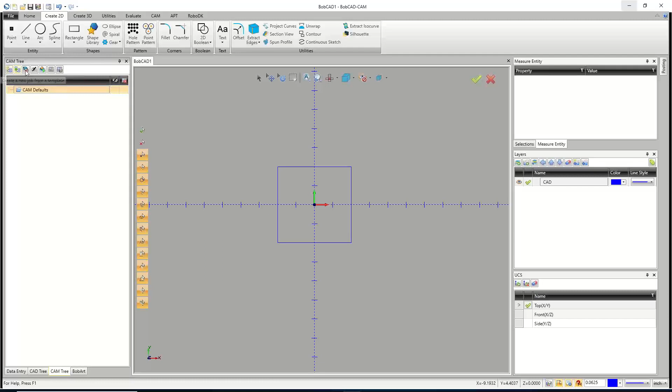So the first way is if we right click on CAM defaults, we have new job. The other one is this little button on the quick access toolbar, add new job. And finally, the last one is on this CAM tab here, new job. They all take you to the same exact place. So you're going to go to the machining job and pick your job type. And just so everyone knows, we're always going to be using milling. Milling is what we use.

The way that we define that this is for a laser, a plasma, or a water jet is by going down here and picking the laser, the plasma, or the water jet. Now, some of you have lasers and everything in here already, built into the system. All you guys with the Baileigh plasmas, we have 3 of them: the Fangling, the Rich Auto, and the Starfire. We have the Baileigh Waterjet. I'm going to just be using the generic BC laser, plasma, or waterjet.

But look through here, there might be one already loaded with BobCAD. We have a lot of these machines and posts that show up with BobCAD. So take a look in there and see if you find what you're looking for. Like I said, I'm going to use the BC3X plasma. And then from here, we're on to step 2 on that page. So we're going to go right to the stock wizard.

The first thing it asks us for is a workpiece. A workpiece is a solid model that represents the final finished part. I do not have a solid model, so we're not going to pick a workpiece. This is one of those things that if you don't have it, don't worry about it. Just skip it. So we'll hit next right here, or forward, or whatever it says.

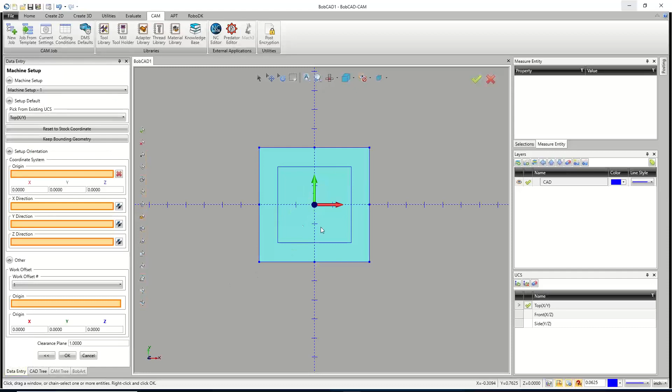So next, right here, we have our origin. I drew my part centered on XYZ 0 specifically because that point is my origin, and that's where I drew it. So I don't have to change anything here. I'm just going to scroll down to the bottom and hit OK.

So again, if I go in and I right-click, let me first blank out the stock. So going in and actually adding the toolpath, I'm just going to right-click on Machine Setup 1. And the only toolpath you're going to use is a Mill 2 axis. From here, we select our geometry. So I'm just going to hold Shift and pick my part.

And that's our chain select. Again, hold Shift, click on a chain of geometry. And if it's all good geometry, it's all connected properly, it will all light up at the same time. All right. For our chain here, I can actually go in and set the start point wherever I want.

Now, one thing I want to point out, and this is something that happens to a lot of milling people. So if your past or your other machines that you run are a milling machine or a router, then you do want to kind of pay attention here. So when you're doing a mill or you're doing a router job, you have a tool that's spinning, and that spinning motion can cause deflection, and there's a lot of things, it can cause problems.

Plasma doesn't have that issue. It doesn't really factor into that. So the direction of cut isn't as important. But what I found out from just doing BobCAD long enough is whenever I pick the geometry by default, the arrow that pops up, that arrow that we see on the left-hand side of that screen there, is always backwards. So it's kind of 180 off from what it should be.

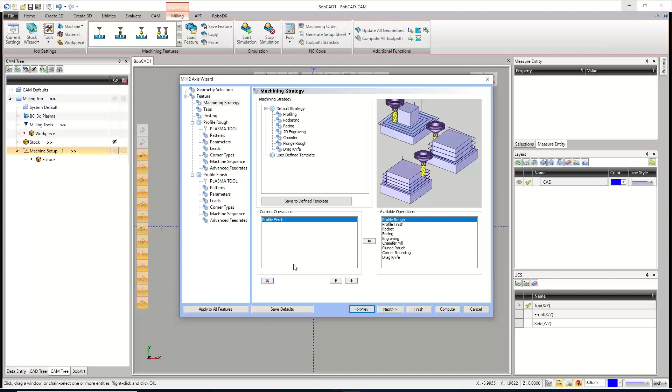We'll go next again. Now for the strategy, there's only one toolpath you're going to use. It's going to be the profile finish right here. So what we want to do is click on the profile rough and then hit the little red X there. Now you could use the profile rough over the profile finish. The benefit of using the profile finish over the profile rough is that it's set up as a finish pass. The rough pass is actually going to have certain passes where material is being left on the part. Your allowance is being left on the part. And so this will make it easy. Everything's zeroed out, so it's all ready for the finish.

So we'll go next. Right here we have our tabs. You have kind of two ways of doing tabs. Yes, you can use tabs through here, and you could do tabs a bunch of different ways. My main way, I'll show you, the first one. So number of tabs, you'd come in and just say, I want 4 tabs. And you'll see that did a pretty good job evenly spacing those tabs for me. That's where I would have put them anyway.

But I could also do a length between tabs. And I had a guy in my seminar class just last week who was playing with this, and he was setting his values to something like a 1/4 inch or maybe more. Let's go, I'll go 0.75. So that would be a 3/4 inch gap between each one of those dots. Lots of tabs. It'd be a ridiculous cut to do.

Something like this, you wouldn't go with 3/4 of an inch. You'd go with 3 inches or 4 inches. You go 4 inches and you end up with 4 of them. Really, we got a 16-inch perimeter anyway, so it's even. But that's just how it goes. So what I usually end up doing, and just because of the shape being so simple, it does get all 4 of these. But another way to actually handle your tabs is to use manual tabs.

And then go in here and say edit tabs. But before you use manual tabs, always set the number of tabs to 1. If you set it to 4, and then you go and use manual tabs, I now have to go in and clear out 4 of them before I can go put my other ones on. So again, set it to 1. Actually, what happens if I set it to 0? So 0 doesn't work. So we'll set it to 1, and then use manual tabs and edit tabs.

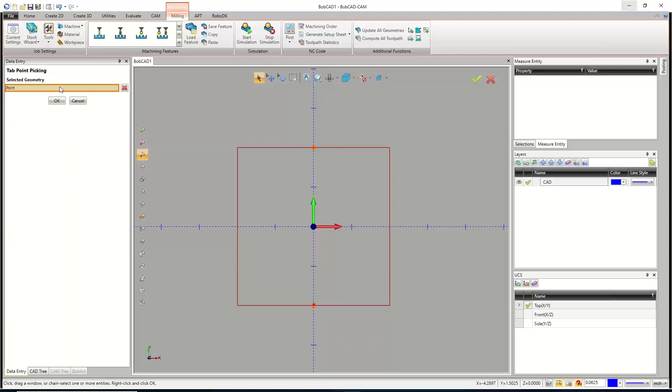And what I do is I'm just going to come over here and I'm going to click on that point that's there. That's designating where that tab was going to be. And let's say I don't want all 4 of them, I just want 2 of them. So I can say I want one here and I want one here. And I'll just hit OK. And now we'll see those are the 2 tabs I have instead of all 4.

Now right here we define the width of the tab. So I can make this 1/8 inch right there. The angle for plasma, let's set it to 90. We don't really want to mess with that. And then the height of it really doesn't matter because normally what this option is going to do on an end mill is lift the tool, cut across the part, but leave an area that's uncut. In the plasma, laser, waterjet scenario, it's just going to shut off the plasma, feed across the area it didn't cut, turn back on, and continue cutting. So, again, I'm not going to use tabs on this right now.

Right here we have our posting work offset number 1. So if your machine does use work offsets, G54, G55, or whatever your machine calls them, this is where you could set up the different work offsets. So we have work offset 1. That's going to be the equivalent of a G54. If you click that box there, you have a drop down. Looks like this one's got 54 work offsets built into it. So you could set up to 54 parts with their own individual work offset if you wanted to. I would not recommend that, but you could.

For your output rotary angle, this is not something you'll use for plasma, so it's not something you need to worry about now. And then next. This contour ramping doesn't matter. All right, so the plasma tool. So this is really what we're testing.

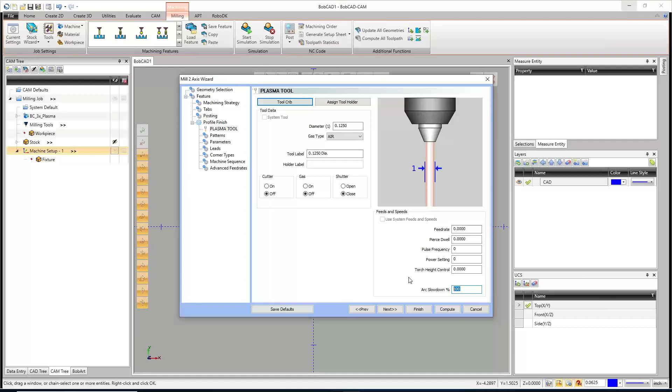Your arc slowdown slows down the arc moves that are output in the program. So if you don't enter a feed rate, there's really not much we can change here. But we really don't use the arc slowdown. You could, but I'm going to show you some other methods. Next, we then have our patterns. So we only have one pattern. It's standard. That's what we want.

And right now you'll see that the system compensation is set to left. Because of the direction I had my geometry, remember my arrow's pointing this way going down, if I compensate to the left of that, I'll be inside. If I compensate to the right of that, I'll be on the outside. So I don't have any rotational forces or climb versus conventional milling that I really have to deal with. So I'm just going to say my system compensation is going to be set to right, so it goes to the right side of the chain instead of the left.

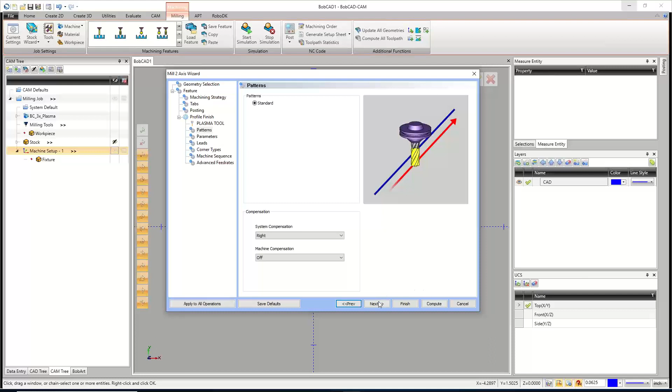Next, we then have our parameters. Now, this is the main reason why we choose the profile finish toolpath over using the profile rough. The benefit of this is I don't have to add or delete or change any settings on this page. It's just going to be set. I don't have any allowances to worry about. I don't have to worry about multiple steps.

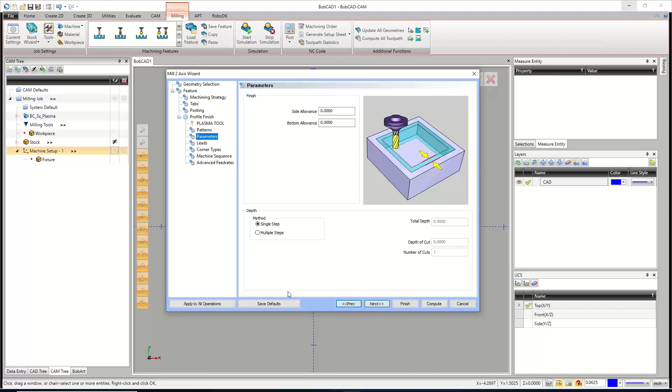So let's go next. Right here for the leads, just going to go vertically. Or in this case, no, we'll go with a parallel lead. So parallel lead, the rule of thumb that I follow is, when you're setting up the length of your leads, you use the radius of the tool. We're using what we're calling an 1/8 inch diameter kind of cutter.

And so I can go in here, and the minimum I'd go is say 0.0625. I'm just going to say it's an 1/8 of an inch right there, and then hit next.

Right here for my corner types, I'm not going to make any changes. If you want round corners on your part, draw your part with round corners. What these options are really doing isn't adding a radius to a corner or anything like that. They're just changing how the tool interpolates the corner. So if your part is drawn with a sharp corner and you change these settings, you will still get a sharp corner. If it were radiusing or breaking your corners at all, then on this round option here, it would ask you what radius you want. Since it's not asking us for a radius, it's just going to change how the tool rolls around the corner. Instead of a hard 90-degree turn like we see with sharp, round is going to round out that path, but you'll end up with the same looking part.

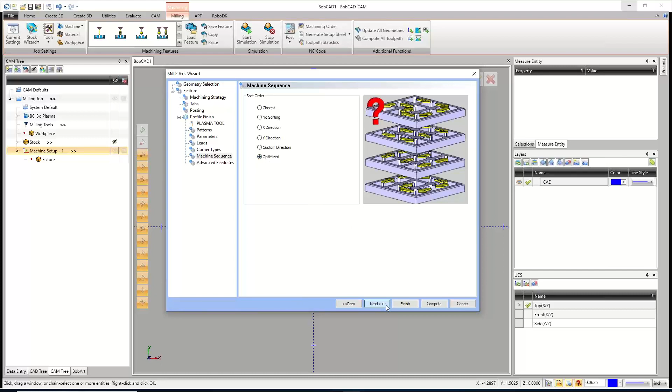And then hit next. So right here we have our advanced feeds, which we don't really have to worry about. But I do want to talk about this thing in the bottom corner, the corner slowdown.

So if you think about your plasma, or probably your laser and waterjet as well, when you make a cut — let me open up a new window here. So when I go to make a cut, we're looking at this from a side view. I'll say it's 1/2 inch thick. Son of a gun — 4 inches, 1/2 inch. There we go. So picture your cutter here, kind of cutting down this side, standing vertically, cutting across the part, just cutting through here.

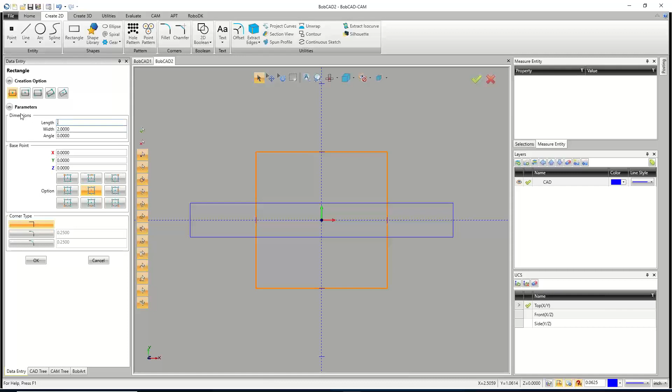When you run that at whatever good speed you get, your plasma does not stay perfectly straight — it's going to have a curve to it. So let's picture this as the plasma, 0.125 length, all right, so there is my plasma. And so I'm going in and making my cut. Give me a second, I got this thing on. So I'm going in and making my cut. The problem is the plasma doesn't actually go straight through — it actually seems to move more on an angle. I don't want to say 45, we'll say 30 degrees though, where the tip of it is spraying vertically, but then it's kind of cutting.

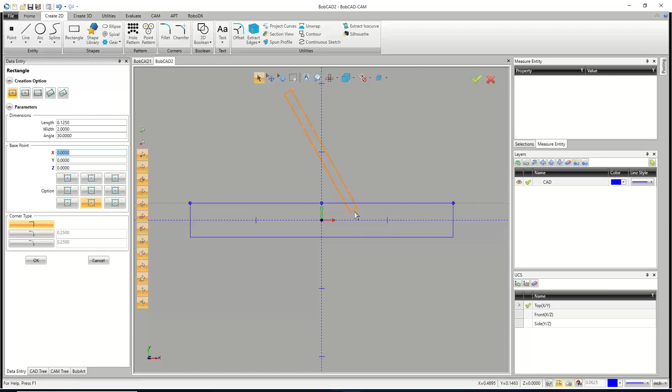It's cutting through the top, then it's cutting through the bottom, which creates an angled section like we see right here, like an angled cut down, but it could also be more swoopy on the corner. It might have a curve to it because it's cutting through the top and then blowing itself backwards, which is fine a lot of the times — cutting simpler stuff, you don't have to worry about it. But if you're trying to be more accurate going around a corner, what ends up happening is if we just let the machine run around the corner without ever slowing down, we end up cutting the corner off because our plasma is, again, not vertical. It's got that sweeping back, always sweeping back in the opposite direction you're cutting in. So if I get to this corner here, and the bottom of my plasma is somewhere down here where I'm working on an angle, and then the head of the machine starts turning, well, I'm going to nip off some of that corner potentially, some of that extra stock that's around the part.

And so they added in this corner slowdown option right here, and you turn it on. You can say whether you want to do all corners, just internal corners, or just external corners. You set the minimum angle that can be read — in our case, we set it to 5 degrees up to the maximum 175. So it's looking for corners that fall between those two angle ranges. Now, the distance from corner is how far from the corner we're going to start affecting this — start changing the feed rates or whatever. And the distance from corner right now is just 1/4 of an inch.

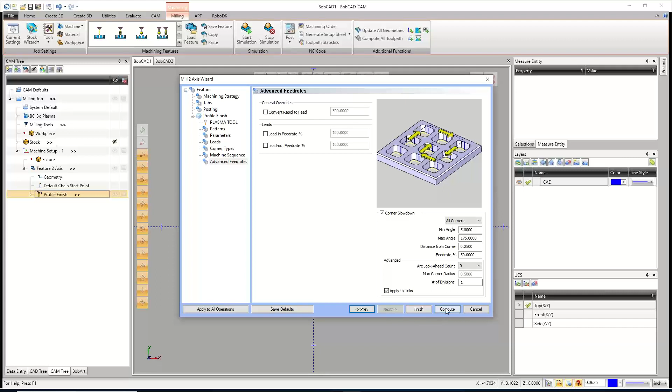I'm not applying that to the links. Yes, I am. All right, so notice we can't hit next anymore. So we'll go ahead and hit compute. And there's our part. My leads are not in the right spot.

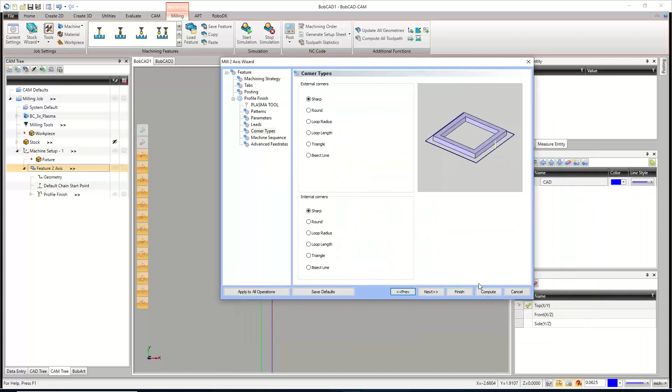Oh, hold on. So I have my corner type set to round, so you'll see that right there. I have a lead-in that's going around cutting, but instead of leading out, it had to radius that corner. So if I go back to sharp and hit compute, now it's sharp. There's our parallel lead-in, then it goes around the part with the parallel lead-out.

So there it is. This is a file I strongly, strongly, strongly recommend building or creating, this kind of very similar part file to this. A 4x4 square. And again, now we're going to go in and we're going to cut. We're going to go take this out to the machine.

So right now what's happening, that green line that we see around here, that's the offset for the side of the cutter to encounter the material. So if I set my diameter here to 0.125, and I got to be real close with this, but I'm just going to go ahead and put this right here on the edge. And you'll see where it touches. That's there to represent the plasma.

All right, right there. Now what I want to do is I'm just going to go utilities and translate. I'm just going to translate a couple copies of this down. I want to just go straight down. So I'll go minus 0.5. That's a bit too much. Minus 0.25. There we go. So we'll go minus 0.25.

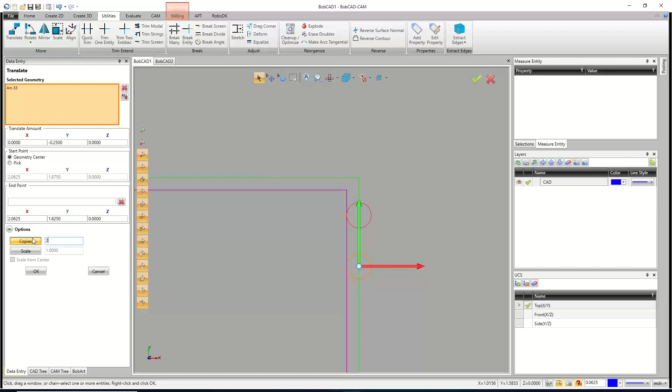And I want to do that for a couple copies, so we'll do, we just need 2. Right? Yeah, so we have 3 total. All right, so this one is set to 100 thousandths.

So now what I'm going to go and do is I'm going to change this one. So I'll say entity modify. Let's see what would happen if we cut this. And it's not actually 100 thousandths, it's smaller than that - it's 90 thousandths. So we'll say 90 thou is the diameter of that hole.

So hit OK. And then on this last one, we're saying it's an 1/8 inch. Well, maybe it's 150 thousandths. So I'll say entity summary, or sorry, entity modify. I'm going to set it at 0.150 and hit OK.

So here's the thing. If I was to go cut this, and it is 1/8 of an inch, that's perfect, right down the center line, just kissing the wall. That's perfect. We go down, though.

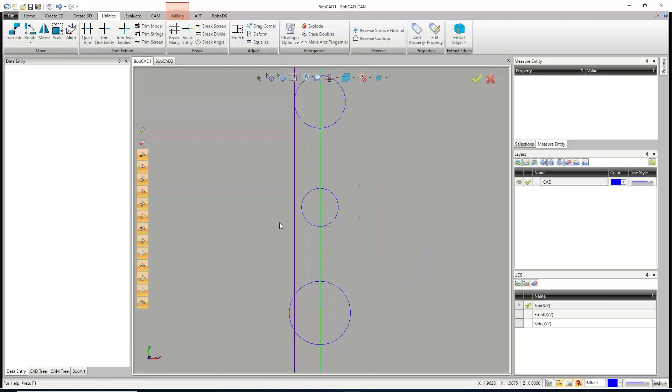This one's here, I got to - I forgot the dimensions I used, so let me just slap some dimensions on here. There's my, let's go 4 places. So there's my 1/8 inch. Why is my height so big? I guess I'm not that big. So there's my 1/8 inch.

There's my 90 thou. And then finally, whoops, and then finally, 150 thou.

All right, so if you were to think about this, that much overcutting is going to make your part not read as 4. It's going to read as something smaller because our tool was defined as, because our nozzle is larger than what we thought it was. We put it, we left it at 1/8.

So it all depends. Now here's the thing. If we were to go in and find out that, hey, this 150 thousandths seems more accurate, it seems closer to the machining, the size I'm doing, you can change it. You can always go into your feature and change it from 1/8 inch to 150 thou, or 90 thou, or whatever you end up needing to change it.

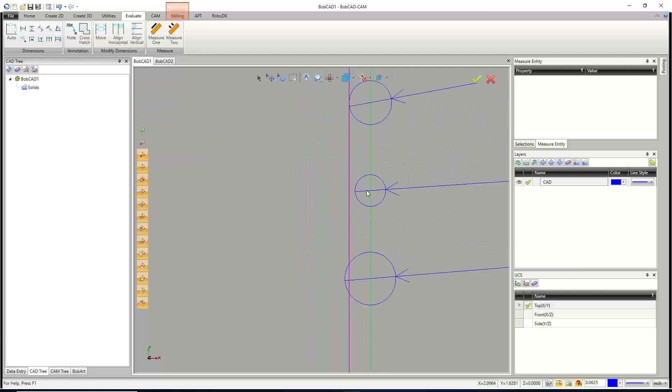So yeah, this is that little test. So you can see, again, if you cut it with a 90 thou tool, we're not really touching the part, we'd have to move this all over. And that's what I didn't really want to do. I didn't want to have to shift anything or make any changes to the tool path.

All right, man, we're getting a good class in here. We got 12 of you. Nice work, everybody. Glad you're here.

So that's pretty promising. It doesn't look awful. The tool path looks good. What we really need to verify at this point, for anyone who plans on doing this, is make sure your post is right. Make sure you pick the right post first, and then go and post your code.

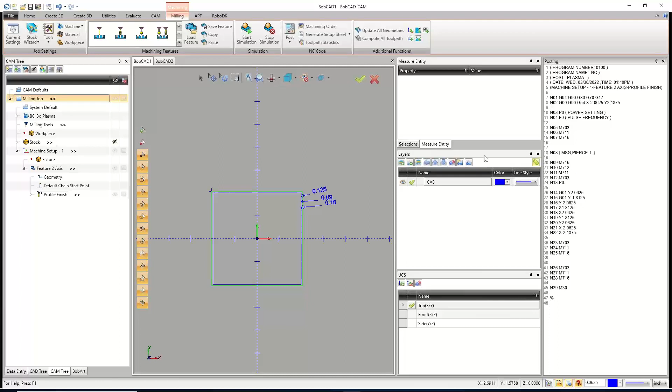When you post your code, you'll be able to look through here and see the sizes and everything, find out if everything looks right. Save it if you need to, or do this later. But let's just go ahead and simulate it. It's not a huge deal to simulate this part. You don't really need it, but I'm going to let it load up. Plasmas and lasers both show up with a red tip, and the water jets have a blue kind of tool sticking out of them. So that's what I got right now.

I'm just going to go ahead and keep it kind of slow. Don't need to go too fast, and say run. And you'll see it's just going to go in and cut a 4x4 square.

Now, if you're going for it, you'd pull it out of the machine, give it a measure, find out if you're off at all. You can use a picture just like this. If I find out that my plasma sprays at 150 thousandths, then I'm going to go in and change everything to 150 thousandths, so hopefully I don't forget it again. But that might not be your number - you just got to find out what your diameter is. This little project will help you figure that out.

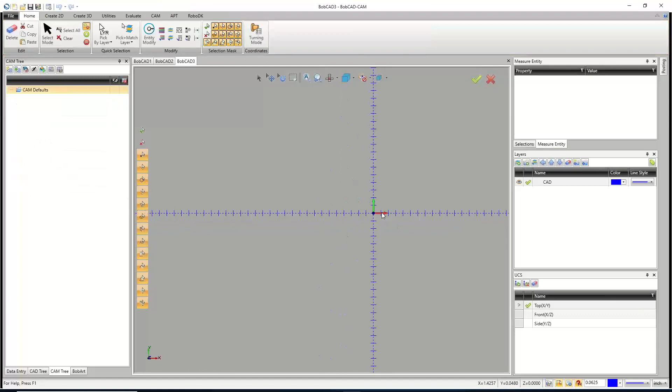Like I said, this is going to be a little bit more in-depth than you guys normally go with the drawings you have to make, but it's not too bad. So I'm going to start off and make a new layer, and I'm going to call it solid, just so I can put the solid there later.

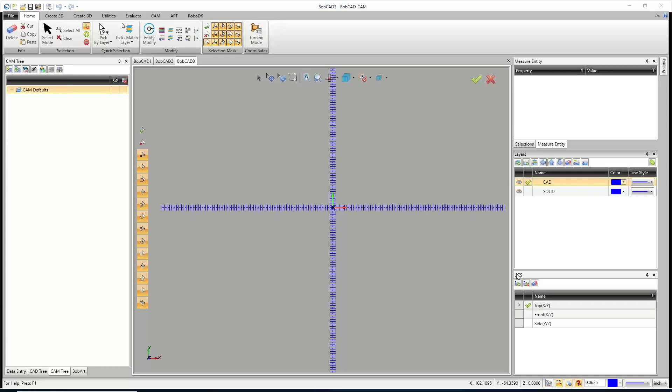This might be the first time some of you are seeing this UCS tab down here and how it works. The UCS, I believe it stands for User Coordinate System - yeah, because it's not universal or anything like that. So by default, we're always opening up our BobCAD in a top plane, a top UCS, and that's where we draw everything. We also, by default, have a front UCS and a side UCS.

Let me just draw out a cube real quick so you can visualize. Here's a 3D cube - I'll make it 10 by 10 by 10. Way bigger than it needs to be.

But this would be looking at it. This is an awful one to do, but let me do it this way. Here, I'll do this. An arc, we'll make it 20 in diameter. So here's a top plane arc. I'm just going to slap it down right there. Now, if I switch to a front plane UCS, that's the difference. So it's the orientation in which we draw our geometry.

If I go to a front, there it is. We're looking at kind of the front side of the cube instead of the top. And if I hit the letter S on here, the letter T, I can't do it here. Let me just set this right on top of that. So you'll see our coordinate system in the center actually changes.

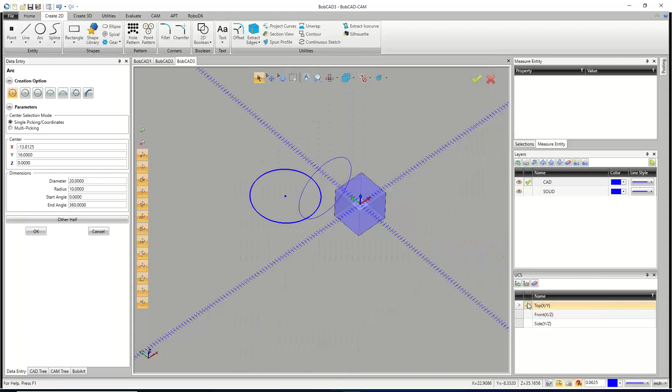Our top UCS has the blue arrow sticking up. Our front UCS has it sticking forward, and our side UCS has it sitting sideways. And it's looking at it kind of like this view here. So again, this is a good way to represent your different shapes. So I just want to go in and use this side UCS, all right?

And I'm going to start by making an arc where the diameter is 3 inches. And I'll hit OK. Let me zoom in on that right there. So there's our 3-inch arc. And then I'm going to make one that is 2.75. So we'll have 1/8 inch walls on here. So I'll hit OK and cancel out. And there we have our kind of wireframe for this.

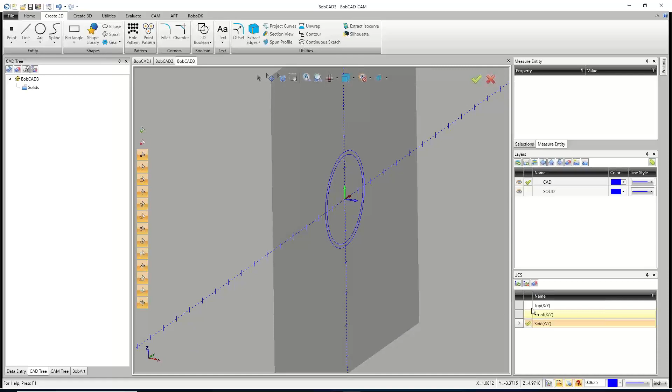The reason I like to draw it this way is now when I go to a top plane, that's already rotated for me. I could have drawn it straight and then rotated it, but that's a lot easier. You just draw it from a side plane. Now what I'm going to do is take this. This is going to be a tube eventually. I'm going to create it as a tube, and then we're going to unwrap it to make it a flat object that we could cut and then roll back up. A very small scale example.

So I'm just going to go to Create 3D and then Extrude Curve. I'm going to pick that geometry right there. And I'm going to make it, we'll just say 8 inches long. So I'll hit OK and cancel out. So this is like having a 3-inch pipe. I don't think I have the offset right for the size here, but we can find out.

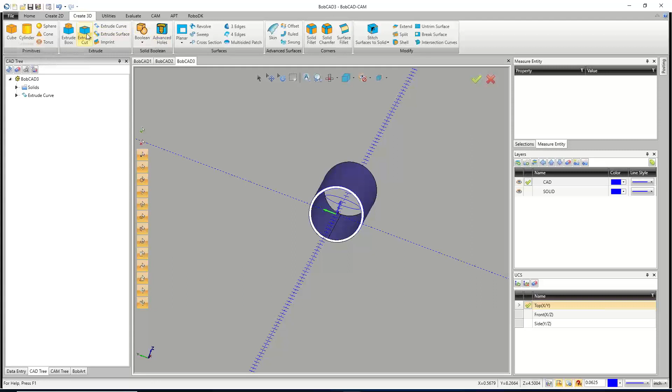So I'm going to go up to the Create 2D tab here, and create another arc. I'm going to set the diameter to 2, and move it to the center of that pipe. So I'll just go 4 inches down. Now you don't see the preview, but I promise it's there. So I'm just going to hit OK and cancel out. And if I rotate that, there it is. Now I'm going to go to Create 3D and Extrude Cut. And I can take this arc right here and extrude it through the model, just like that.

Now, if you were cutting this, I do have some customers that have 5-axis lasers and water jets, and they'd be able to cut this right on the pipe. But if you're doing like the fire pits and everything, you're going to cut it flat and then roll it up. And so I can't just cut a perfect circle in here if this is actually getting cut flat. So I didn't plan ahead.

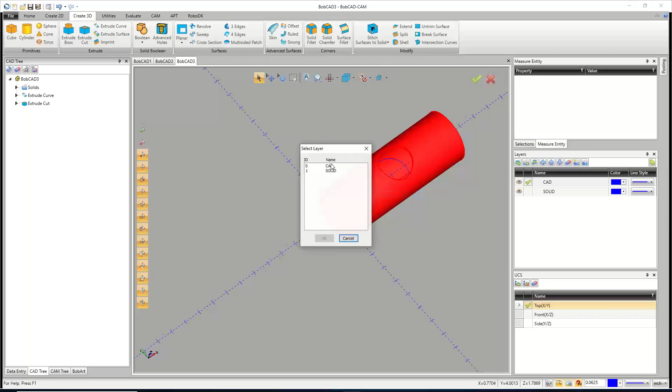Give me 1 second. I just want to move this solid onto the correct solid layer there. There we go. So now I can hide that CAD. So now that I have the solid model, what I need to do is get this as wireframe geometry. I need it as the geometry I would want to flatten out and cut.

And so I'm going to go over here, right click and add a new layer. And this feature is called Unwrap, so that's what I'm going to name it. Now you can find the Unwrap feature by going to Create 2D and then right up here next to contour, next to the Extract Edges area in the utilities.

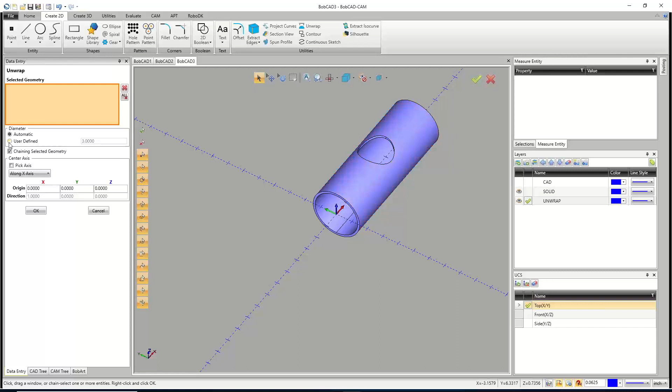So you just go to Unwrap. Now the diameter, you can either go in and define the diameter. We have a 3-inch diameter, or there's an option to just do it automatically. And that's what I usually end up using, unless I have multiple sizes. Maybe you got a stepped part that's a 2-inch diameter, then it goes up to a 3-inch diameter, something like that. That you might want to go in and define based on which surface you're picking.

But for me, all I'm going to do is pick that surface, just like that, and it flattens everything out. And I can hit OK and cancel out. Now, if I turn off my solid, I'm left with this geometry. And you'll see that is not a perfect circle, but it becomes a circle when you wrap it back up. So for my part, you'll notice it didn't give me end lines. All we did is unwrap the edges.

So I just have to go to line here, and I'm just going to join that point there to that point there, and I'll go to this side, and then that point there over to that point there. All right, and cancel out. Now, what you'll also notice is it's at a height. It's raised up, and I don't actually need it raised up at all. What I'm going to do is take this whole thing and translate it so that this corner here is, we'll say, 1/2 inch away from my XYZ origin.

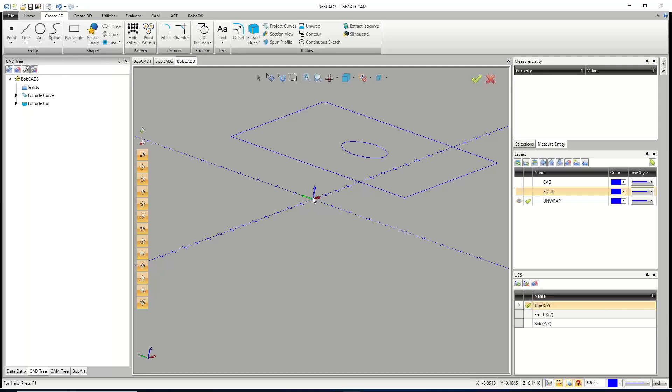So to do that, we go up to utilities here. And then right here, we have translate. On translate, the first thing I'm going to do is pick my entire piece of geometry. By default, it's going to grab the center of the geometry. But I don't want to control the center. Yeah, I could go figure out the length of all this stuff, but I don't want to. I'm going to say pick.

What pick allows me to do is I can now hover over this bottom edge and pick this bottom point here. This point, I want that point to end up at x 0.5, y 0.5, z 0. So it's going to drop it down in z and move it for the x and y moves. And then I'll just hit OK and cancel out. And so that represents my part.

Now what I'm going to draw is a rectangle. So I'm going to go create 2D rectangle, and for those of you that got a 2x2, it's whatever size your machine is or whatever size piece of stock you got. If you got a 4x8, you could set up a 4x8. If you got a 5x10, go 5x10. 2x2 is what I'm going to do right here. So 24 by 24.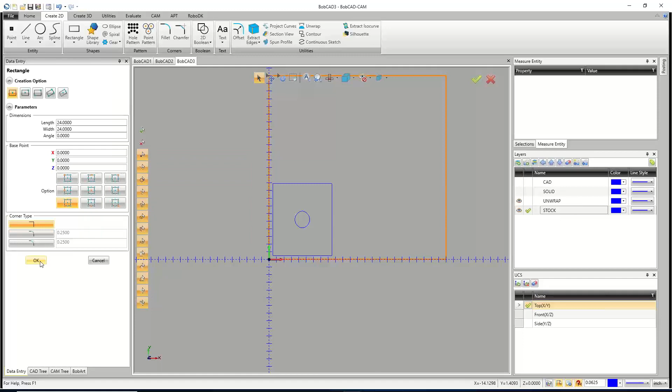I like to draw these rectangles that represent my stock, only because it makes my life a bit easier when I go to actually set up the stock for this. So this really is just stock, and the best thing to do for this would be to make a layer, call it stock, and then right here, I just want to put the bottom left-hand corner on XYZ 0. So just like that. Now I'll hit OK and cancel out. And there we have it. So now we have our stock drawn out.

So the next step would be, do I only need one of these? Do I need more than one of these? What's the steps here? There's quite a few ways to actually make more than one part. There's toolpath patterns that allow you to pattern it to the geometry, and I'll show you guys an example of that. But there's also just using the model, using your CAD and moving extra copies over.

So I'm just going to go Utilities and Translate, and I'm going to hold Shift and pick this inside circle shape there and the outside shape. And I just want to give it enough space to go straight up. So I don't want to move over in X at all. I don't want to move it at all in Z. I want to leave it right on that Z plane. And so in Y, let's say 10 inches. So if I go with 10 inches, it leaves me a gap between the part. Again, I didn't measure the length of that edge right there.

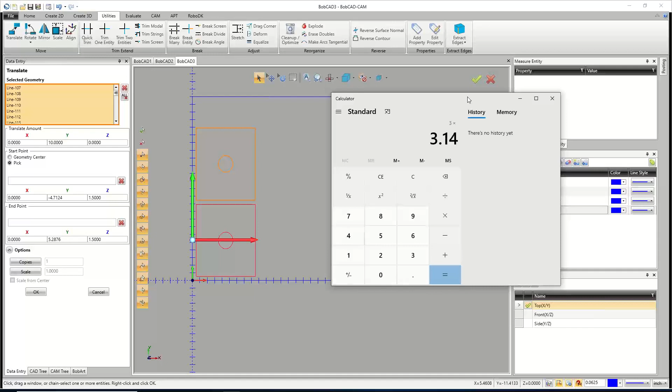I could go measure it, or you can just pull out your calculator. We unwrapped a circle, so we could actually take the diameter 3 times 3.1459 pi, enter. The length of that chain, the length of these lines here, should be about 9.4. So going 10 inches should leave me about a 6/10 gap between them.

Let's go a little bit bigger. I'm wasting, I don't have much. I can't fit another part up here anyway, so I'll just go 10.5. So 10.5. There we go. That gives us plenty of space between the part to make our cuts. The big thing here, and the thing I always forget to do myself, is turn on the copy button. Make sure you turn on your copies so that you don't lose your original and just move it up to there. So I'll hit OK.

Now we have these two. And since I'm in here, let's check our math. If I measure this edge, we will see the total length is 9.4248. We calculated it out as 9.43. Close enough. Good enough. Did I do 3.14? I had a 141 is what I needed. I did it a little off, but that's fine. It gave you enough to know where I needed to be.

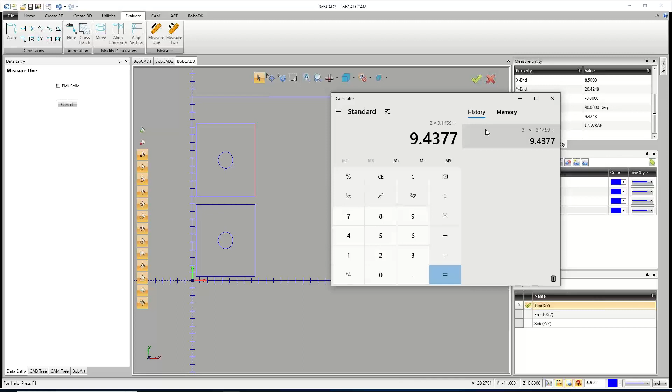This one I'm going to measure as well. This one is a total length of 8 inches. That's how wide I made it. Should have known that. So I'm going to go 8 inches. We'll do, let's say, a 1/2 inch in between them, so I'll go 8.5 inches. So again, I'll go Utilities, Translate. X will be 8.5. Y will be 0. And I'm just going to drag a box over these two parts.

Now, one thing I do a lot is I over select like this, where I'm accidentally grabbing these edges for the stock. Happens to me all the time. But remember, when you pick a piece of geometry, to deselect it, all you have to do is click on it again or drag a box over it again. Remember, boxes for BobCAD, we don't have to grab the entire part. We just need that box to touch any portion of the geometry, and we're going to grab it for you. So you can draw these real tiny little boxes over pieces of geometry to select and deselect them. That's what I do a lot of times.

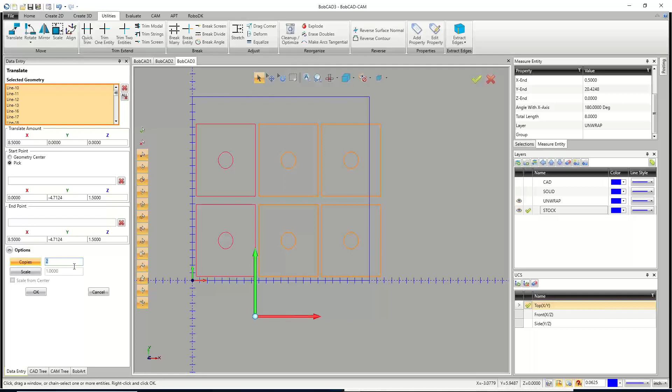So right there we have our 8.5. That's our gap down the middle. I can't fit a third one, but if you wanted to see, you could come in here and say, give me 2 copies. And you'll see we're off by about 1.5 inches, 2 inches right there. So it's not enough to get 3. We're going to get 4. So copies 1, hit OK, cancel out. All right, so now we have 4 parts getting cut, and I'm going to go machine them.

So again, we're going to right click on our CAM defaults. We'll say new job. We're going to go milling. Again, I'm just going to use my plasma because I'm going to steal the tool path I've already done. And I'm going to go to my stock wizard here. Because I have this square around here that represents my stock, when I hit next, it's automatically going to fill that size, 24 by 24. I just have to come in and give Z. The thickness of those walls was 1/8 inch, so 0.125 should be perfect, just like that. From here, I'll hit next.

And my origin on this one, I'm going to use the bottom left-hand corner. Some of you guys might use that. Some of you might not. It's really dependent on your machine. This all comes down to whether or not you have a work offset or a G92. If it's a G92, you could go from the left. You just have to set your part up there.

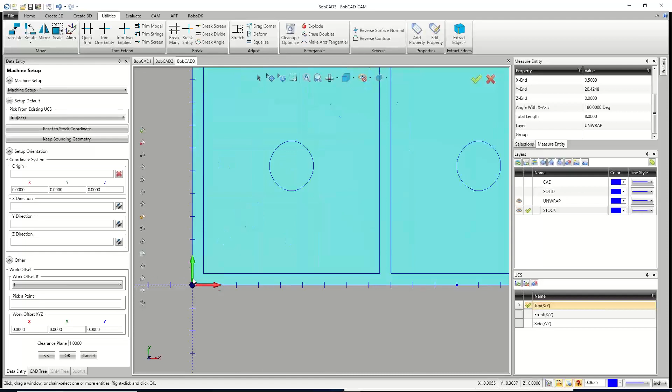If I have a G92 for a plasma, I'm usually going to try and make sure my stock is a bit bigger than my part. That way I could kind of jog the machine in, get it over the material in the corner here, maybe a 1/4 inch up and a 1/4 inch over, and then all my tool path will start a 1/2 inch away, basically this distance away. But it all depends. It's really going to come down to your specific machine. If you're struggling with it, give us a call.

Talk to tech support. Let them know what you're running into. We can help you try and figure out what you might need to use for an origin, or book some online training. Me and Andrew have done many hours of these laser, plasma, water jets, so we're pretty confident in it. And the best thing about the online training is we get to work with your parts. You guys get to send us some parts and say, this is what I want to make, and we're going to show you how to make them.

Because some of you guys might end up doing a lot more CAD work than I'm doing here. We don't have a nesting package anymore. We used to have it in the older versions, but we don't have any way to nest out parts. There is a program. I'll try and find the website. I can't remember what it's called. I believe it was nest.io. Let me see real quick. Nope, that's not it. CAD nesting IO.

So there's this one here that could potentially work. I've never used it. Give me a second, let me open it up. But I believe if you guys ever talk to tech support, you talk to Jason, I believe he's used this. So you download it. It's a nesting software, and you can export DXFs right from it. I believe this is the one. It's called deepnest.io. I'll play around with it later on today. I haven't had a chance to do it yet. But that's a killer one. Might be something that you can use.

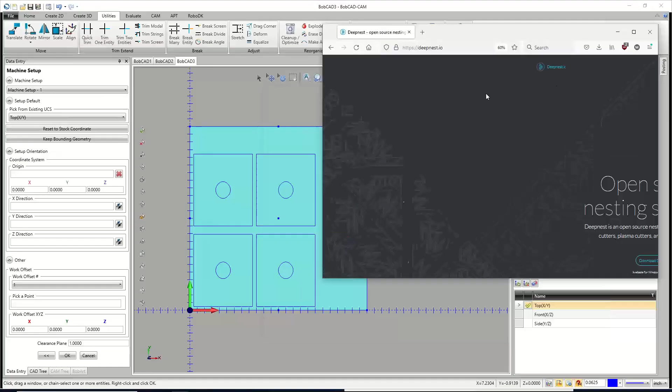But also, this system might have the ability to do something called common line cutting. If this is all nested through this, you can see right here, it's very faint, and I apologize, I can't zoom in on their picture here. A common line cut is where one pass makes 2 parts. It's cutting the left side of one part and the right side of another part as it passes through. We couldn't do that by default, but it's something you could definitely look into. You could set up your parts.

Technically, I could move this geometry over. Basically, I'd want to leave an 1/8 inch gap between these 2 parts, but then I'd want to draw a line down that gap. And instead of offsetting my cutter, I would just do a center line cut. So if these two parts were close together, say an 1/8 inch apart, if I made one pass down the middle of them, I end up cutting both of them.

Now, I've gotten mixed results with my own stuff when you're cutting two parts, more for milling, where the left side part looks great, but the right side didn't look as good. You can end up with situations like that. But it's plasma. Really, direction of cut isn't too important because there's no rotational forces we have to fight against. So I just want to come in. That's it. I'm going to hit OK. So I have my 4 parts done.

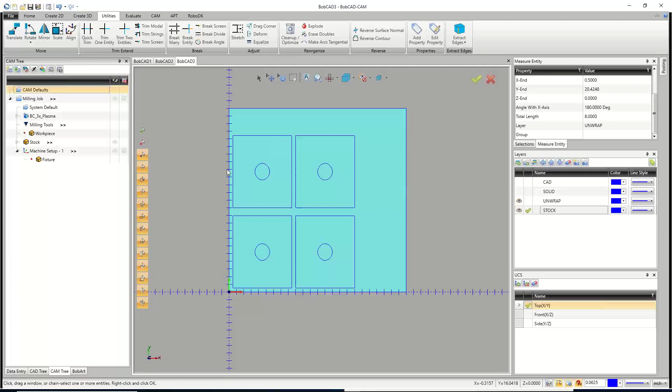Now, after you've made a tool path, after you've tested that 4x4 square that we created just a few minutes ago, and you found out that your diameter is properly set, then what you could do is actually save that tool path. So I'm going to go right here. I'm going to say that this did properly set. My plasma is 1/8 of an inch. Perfect. Again, this is the dialing in you guys need to do.

But after I have it, I can right click on here and either copy and paste, meaning I have the part file open like I do here, BobCAD 1, I can copy it.

I could bring it over to BobCAD 3 and I can paste it. The problem is, what if I'm just working on this file? I don't have any other files opened up. Well, the best way to save it is to save it. Instead of copying and pasting, where is it? Save the feature. So I might have more than one in here. Yeah, I got a bunch of them from plasmas and all that stuff.

So the biggest thing here is you want to make sure that you label it so you know what feature it's for. Now, for those of you that don't enter feeds and speeds in BobCAD, the thickness really doesn't matter. I mean, it does matter when you get out to the machine, and it does matter when you set up your leads. You know, if you're cutting 1/2 inch thick material, you have to pierce longer than when you're cutting 1/8 inch thick material. So that stuff will have to be factored in, but most of that stuff, for some of you, will be done at the machine. The leads will not be done at the machine. The leads will have to be done in BobCAD.

Again, go through the manual, see if they have cutting conditions in there, because I know for a fact that Thermal Dynamics A60 will tell you how long to pierce and how far away to be from your geometry when you look up the material. Like if you're doing certain thickness of aluminum or steel, it'll tell you how far away to try and start, how long to pierce, and then what feeds to use. So it's kind of all ready to go.

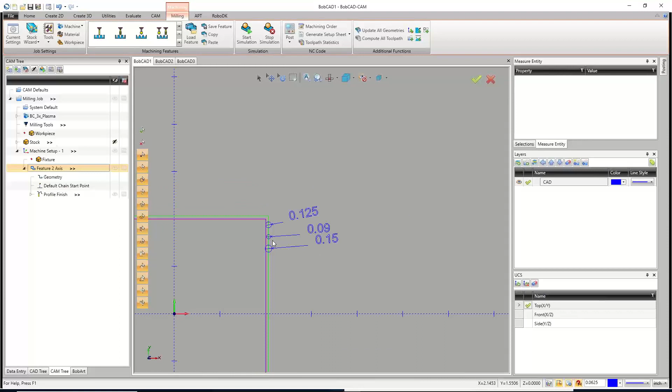So I'm going to call this live event, just so I know which one it is. Live event plasma toolpath. All right, save. Now, the cool thing about that is when you save a toolpath or when you copy and paste a toolpath, we remember every setting you put in. So for those of you that don't get the luxury of putting all your feed rates in at the machine, you're going to put them here in BobCAD. After you set those feed rates and pierce dwells and all that stuff, it's saved for good.

The only difference would be if you have different gauges of material. If you go from an 1/8 inch up to inch thick material, those feed rates are going to be different. So you would want to save a separate toolpath for each thickness. But even that's not that big of a deal, because I could load a toolpath that was made to cut an 1/8 inch, pick my geometry, go into the settings, and change those settings to make it ready to run for something that's an inch. And then after I compute it and everything looks good, I'd then save that toolpath. So now I'd have a toolpath for the 1/8 inch, and a toolpath for the 1 inch thick or whatever else.

So now that the toolpath is saved, I can right click on Machine Setup 1, and I'm just going to go down to Load Feature. And I'm going to pick my live event plasma profile here. And it'll say, do you wish to use the same type of feature and depth values? Yes, I would. Now, again, when you copy and paste, when you save and load, we remember everything you did except for what geometry was selected.

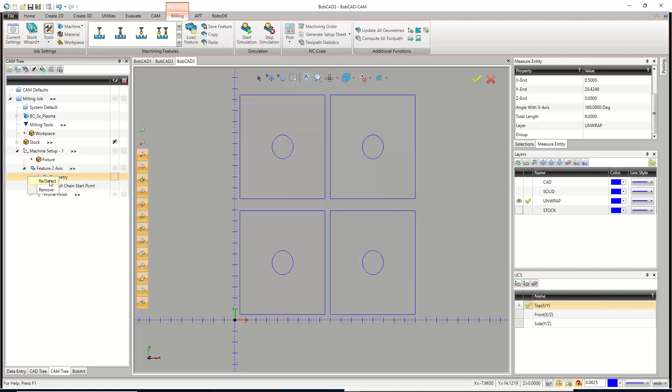So I have this. I'm going to try and do it all in one. I'm going to right click on geometry. I'm going to say reselect. I'm going to drag a box over all my geometry. And then I'm going to look at everything.

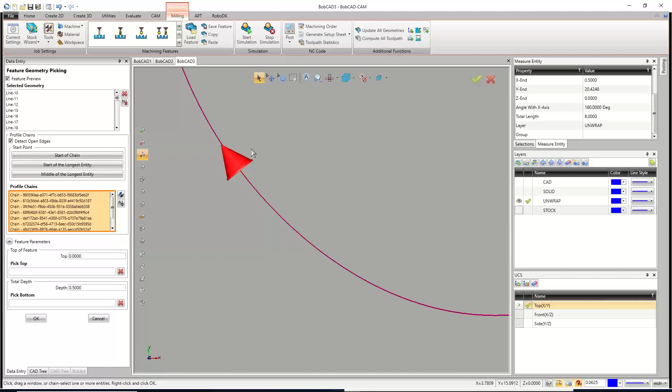You could look at all your chains. The tool path that we saved, I believe, we had the compensation set to the right. So I want to look at all these leads here and see to the right is the direction I want to be on. That'll put me on the inside there, and to the right will put me on the outside there.

Now another thing to take note of, if I do inside shapes versus outside shapes, look at the outside shapes. If I do a parallel lead-in on those, it's going to work great. But a parallel lead-in doesn't really work on the inside of an arced kind of piece of geometry. So I'm going to have to go change my leads and probably go with something like circular or a right angle, probably a right angle lead makes the most sense.

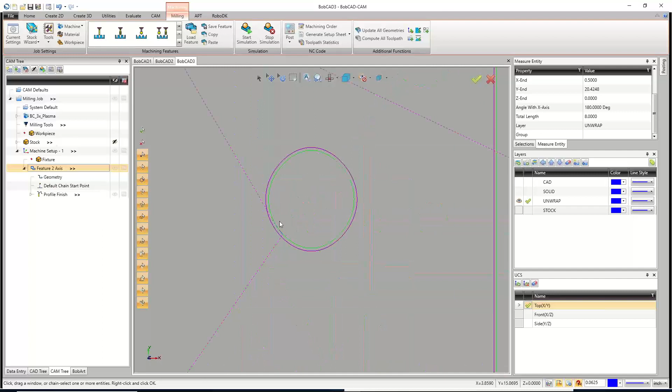But I'm just going to start by hitting OK, and then go compute the toolpath. I'll just right click on the feature 2 axis and compute all toolpath. You'll see there's my little parallel leads there. Like I said, they're great on the sharp corners on the outside, but it doesn't really help us on the inside. So we could do one that kind of works for both of them.

We'll edit our feature. I'm going to go to the leads tab, do a right angle lead, and hit compute. Now I have this little right angle. Don't know if it's the right length. You know, this is 1/8 inch thick, I haven't really defined what the material is. But there it is. Now we're doing all 4 of those.

So if I save this, I'm just going to do a save as. Let's go put this in my... the heck is it? Oh, it's on my desktop right there. So desktop, repeat training. Do I have a laser plasma? Well yep, right there. So this will be my unwrapped, right there.

All right, so now we can go simulate. I always like to save before I simulate. That's one of the biggest tips I could give you guys. I mean, save often anyway, but anytime you're about to run the simulation, save, because the simulation can be, depending on your computer, depending on everything, one of the hardest hitting things your computer deals with while it's loading up, while you're working in BobCAD. Plus, save often, we've all gotten burned. No point in doing it more than once, right?

Even after you do it once, it'll happen more, you know, it'll happen. All right, so we're going to go up and say start simulation, and just give it a second to load.

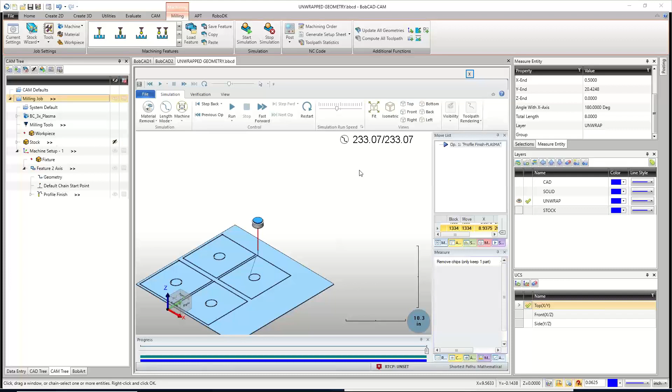Real simple, real easy. So I want to show you guys another method of getting those same 4 parts cut. I'm going to do this by removing the geometry from the toolpath and reselecting just the first part here. I'm just going to pick those 2 and hit OK, and go compute that. So we're on the outside there and the outside there. So this chain right here is backwards.

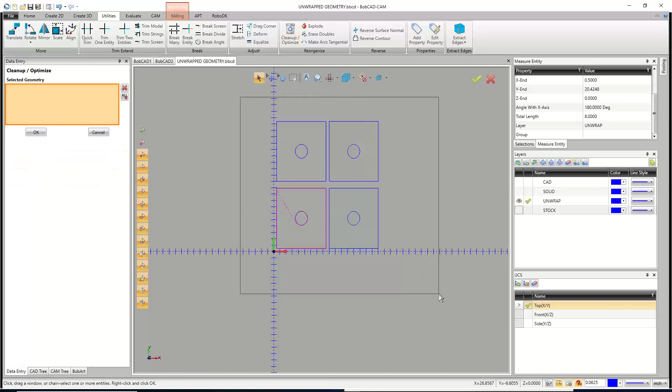If this ever happens to you, a lot of times it's a sign that there's bad geometry. That's always the first thing to kind of take a look at. But I've already seen this, it looked good, I know I got good geometry. If you're ever concerned that you have bad geometry, duplicate geometry, broken geometry, go to Utilities, go to Clean Up Optimize, and drag a box over all your geometry, then hit OK. No corrections were made.

That's great news. These arcs right here, we got 4 of them, but if I go into my entity summary, those things are each probably about 300 each. They're 315 entities a piece, and that's because it created them as a bunch of line segments instead of arcs.

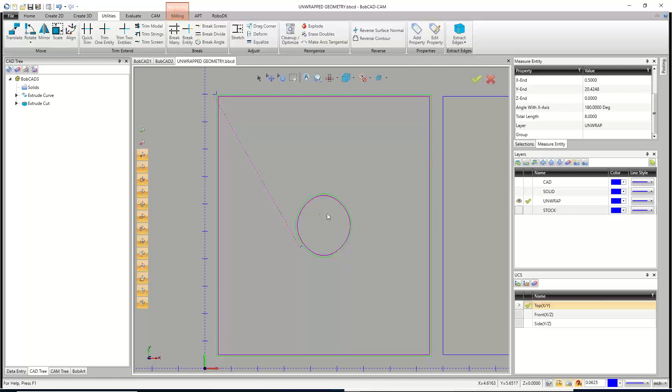It's part of the unwrap, it unwrapped it. Shouldn't be a problem unless your machine doesn't look ahead far enough and it becomes kind of a stuttery mess on that, but it's something you'll have to test out on the machine. If you let us know, sometimes it could be you got to change your feed rate, maybe slow it down. There's some settings we can do to try and help that, or you might have to rebuild this arc or this geometry with more arcs.

So that's all good, it is all selected there. Now I'm just going to go ahead and fix this one here. The problem is this is broken into 315 little segments. So my kind of cheater way of doing it is I'm going to reverse the direction for both of these, this one and this one, by just right-clicking on default chain start point and saying reverse direction. Then I'm going to go ahead and recompute.

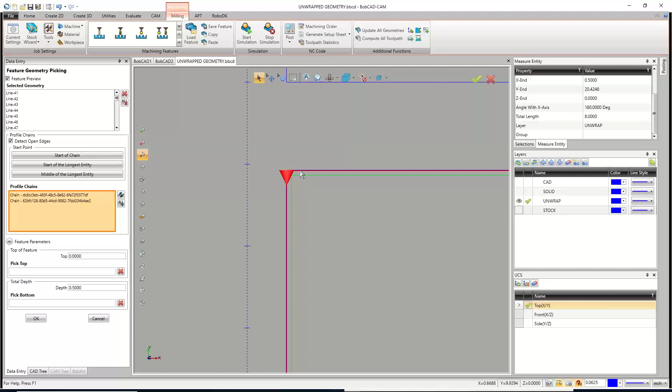So what you'll see now is we're on the inside here, which is correct, but we're on the outside here, which is incorrect. That works out for me though, because I can right-click on the default chain start point now, and instead of doing a reverse direction, which reverses both of the arrows, I'm going to say modify. On modify, I'm just going to click the tip of this arrow right here, hit OK, and recompute. Now we're back on the outside.

All right, so we got the inside and the outside. So say you only drew out one of these parts, but you wanted 4 of them to get cut. What I have to do first, and I'm lucky for us, I've already done the math on it, is take a measurement. I'm just going to go evaluate, measure 2, and measure from this edge here to this edge here. So my distance in X is going to be 8.5.

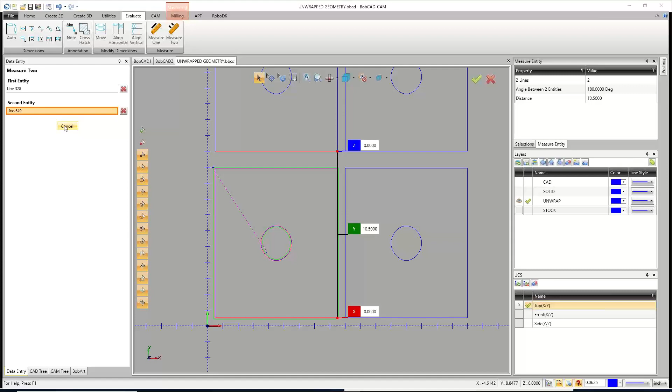Then I'm going to do a measure 2 and go from the bottom line here to the bottom line here. My distance in Y is 10.5. Now that's important because when I go to my CAM tree, I can right click on my feature 2 axis here, and down in the middle we have an option called add toolpath pattern. So instead of programming all 4 parts, or even drawing all 4 parts, I can technically just draw one and then say add a toolpath pattern.

Sorry, give me one second. There we go. So when I add a toolpath pattern, there's a lot of things you could do. You could do an array, you could do a translation, you can rotate them, or you can set them up based on points. I want to do an array because I have a specific amount I want to move, so I'm just going to hit next.

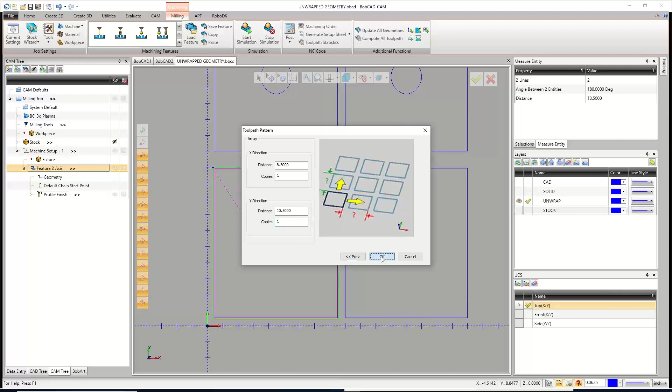So from that toolpath that it created, I want to move over in X 8.5 inches with 1 copy. Then I want to move in Y 10.5 inches, again with just 1 copy. The way that these copies work is essentially we're going to take our original, make a copy for the X, and then take both of them and make a copy for Y, but it's still just 1. So I'll hit OK, and you'll see we've now translated, or toolpath patterned, all those toolpaths.

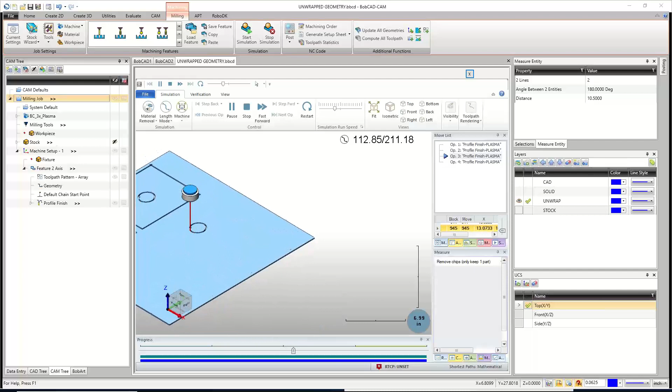So if I save, and then was to say start simulation again, it should run in the exact same order as before. I'll just say run, starting on the inside and then doing the outside. Yep, just like that. There it is. So that's the toolpath pattern.

Another little thing I just want to point out, for those of you that have bigger machines, 4x8s, 5x10s, if you create your stock as this big 4x8 sheet of material, the simulation is going to look awful, it's going to look really bad until it finishes. So always make sure, if you see it looking bad, let it finish the job, and then it does this automatic thing. It just disappeared, but it does this. Come on, it'll show up again for me. Whoops, dang it, I meant to show you guys that in a second.

Hold on, let me run this again. As it finishes, I want you guys to pay attention right here on the bottom of this simulation. Let me speed it up a bit.

Right here on the bottom of the simulation, you'll see this automatic quality improvement of the view area. What it's doing is cleaning up that geometry. That's what you want to wait for if you have the three axis, or if you're using a big piece of material, a 4x8 or a 5x10. So there you go.

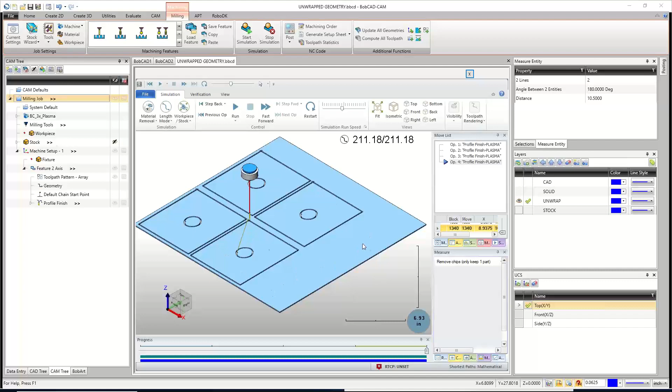Now the other thing I want to show you is I want to see these parts. I want to see what they look like done so you can get a good idea of it, but those extra pieces of geometry are kind of in my way. So what I'm going to do is go to this column here on the right, these extra tabs that we have, and the one right down here is the measure tab.

Now, normally when this is not in use, you want to turn it off. The reason I tell people to turn it off is because when you rotate in BobCAD, when you rotate the view of your screen, you click your middle mouse wheel down like a button and move your mouse, it's going to rotate that part around. That is not how you rotate in the simulation. In the simulation, you left click, hold, and rotate.

So the reason this is important is on this measure tab, we have this option called remove chips. I'm going to say remove chips, select chips. When we use this, we actually use our middle mouse wheel like a button to tell the simulation what to get rid of. So what I do is I hover over an area I don't want, and I click my middle mouse wheel like a button, and you just wait a second, and it'll disappear.

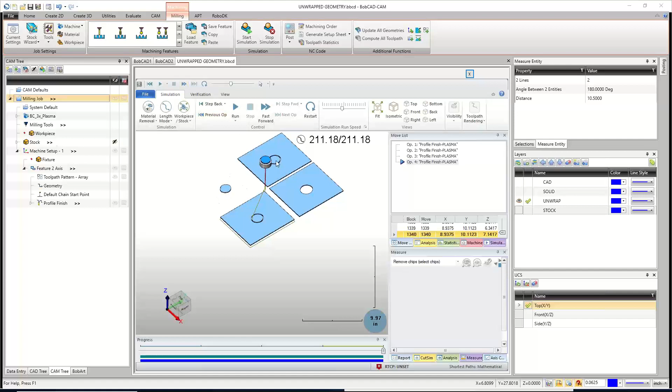So I could do that to all of these pieces of geometry. Oh, I accidentally clicked that one too early, but whatever. Get that one, get that one. So you'll see there's my three parts, and I accidentally got rid of the wrong one over there. But they're all the same, so I can get a good visual of it.

And there it is. Now, I don't have any way to rewrap that to find out if that's perfect, but we did unwrap it, and we did create the geometry based off that unwrap, so it should be pretty good to go. So there it is, there's our part. So we'll close out.

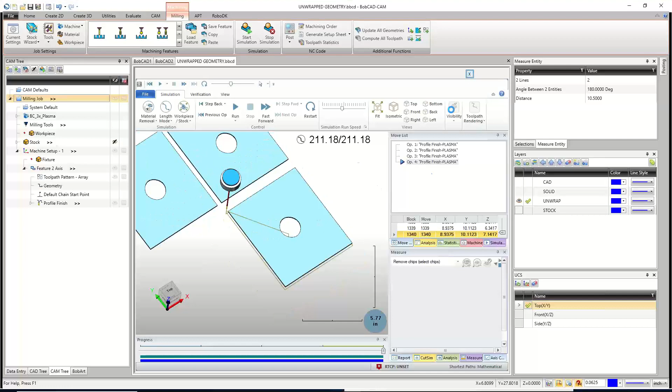All right, so if we go back to our cheat sheet, we'll use this now. We've gotten through the point of - let me go back a page - step number 5. So we've gotten through step number 5. We did our tool path.

The machining order doesn't really apply to us. If we go in here and look at our machining order, we only have the one feature. The one feature, though, is smart enough to know that it should be doing the inside shapes and then the outside shapes. And as we saw in the simulation, it is. That's the only thing we really want to double check, and it doesn't really have anything to do with the machining order.

Now, it could have something to do with the machining order if you decided to do a 2-axis feature, a plasma, laser, waterjet feature for the inside shapes, and then a feature for the outside shapes. You'd have to make sure those are in the right order. But really, it's just do all your inside shapes first, then do all your outside shapes. And it should always come out in the correct order because you're only using one tool technically.

So the machining order, again, not going to be super relevant for what we need. But if you have multiple plasma paths, you got to make sure they're in the right order they're cutting. Whatever the order is you see inside the simulation, that's the order the job's going to run in. So if you're watching the simulation and you don't see any problems, you're probably fine.

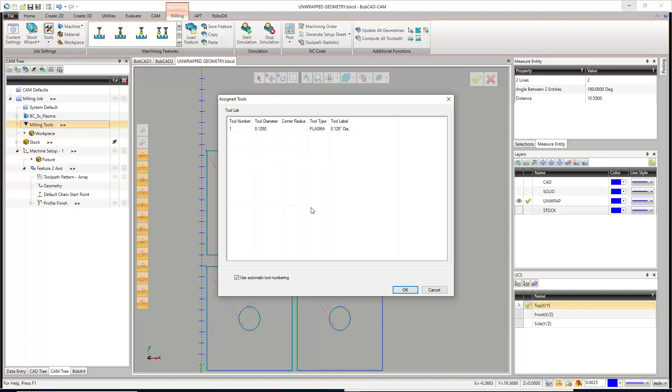So now I have step number 7. So verify tool assignment. We don't have anything to verify. Verifying the tool assignment means going in and seeing what tools are used. We only have one tool. So verifying the tool assignment, really the biggest verification we're going to do is make sure that that diameter is the right diameter for our plasma. And again, we're going to do that by just machining a 4x4 square. And like I said earlier, if it's an 1/8 inch, it'll be right on target, 4 inches across.

If the part comes out larger than 4 inches, then your tool is actually smaller than what we set it up as. If it cuts the part too small, your tool's too large, or actually in that case, our tool's too small. It needs to be 150. And then that way, even if it's 150, it's just going to offset further to the right here so that that edge is cutting just like that 1/8 inch right there along that edge. So just be aware of it. That's kind of the first test I would have you guys do if you haven't really gotten into this yet.

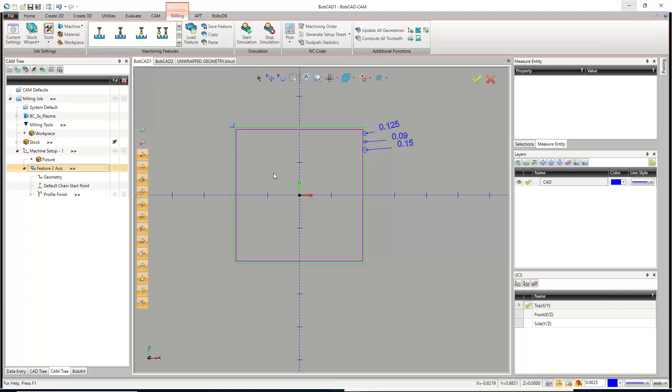Otherwise, there is a lot of help online. The guys at Bailigh Industrial are really, I've yet to have an issue with most of the guys that I've talked to for any company for plasma, because it's simple. You know, it's real simple. The code's simple. Everything's simple. Might as well ask them, and they can usually help.

All right, let me go back to my cheat sheet here. So we verify the tool assignment. Again, we don't need to do that. We simulate the final program. We did that. Everything looked great. But if you do find problems, other than the obvious ones like feeds and speeds, that could always be an issue, your leads will end up being probably the biggest killer. And a lot of it comes from the fact that sometimes I can use a right angle lead, sometimes I can use a parallel lead, but sometimes I can't use both of those on the same part.

So like in the case we're in now, I could end up taking these tool paths that are cutting the arcs, and I could set those up as internal tool paths with a right angle lead in. I could then do a simple copy and paste of the tool path, and I could do the outsides with parallel leads. The benefit of doing that is you have two tool paths, and you're getting them to lead in the way that works the best. A parallel lead in works the best on a corner because you're actually piercing away from the part and then coming straight into it. Right now we're doing these 90 degrees.

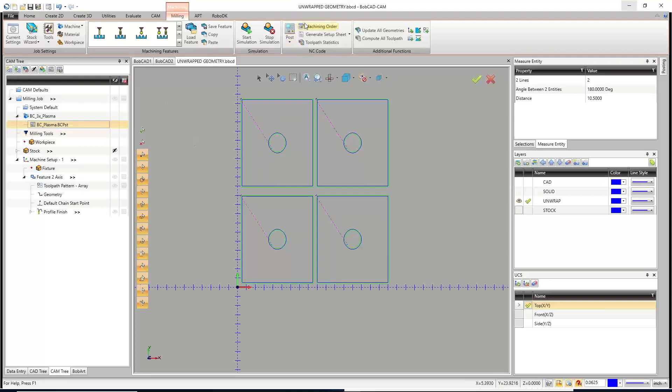So, all right, you simulate the final program, then you post the code, then you generate a setup sheet. So we'll go ahead and post the code. I'm using this BC3X plasma or the BC plasma post. But again, you'd always make sure you have the right post processor and then hit post. Now, again, depending on your machine, you might have a G54, you might not.

This one, this generic plasma that we have here, does have a G54. So I can actually go in, I can set up, zero out my machine right at that bottom corner, and then I'm set for G54. I can move the head wherever I want, and it still knows where G54 is until I shut the machine down, and it forgets all that.

The other way of running it, let me switch to one of these Bailigh posts. I believe it's the Bailighs that do it. Let's find out. So we got the Bailigh Fangling. It's one of them. So this one, when I go to post the code, you'll see there's no G54 in the code here. This is the one using that G92. And so what G92 is going to do is wherever the head of your machine is sitting, when you hit go, that's X0, Y0, and all your moves will then move from there.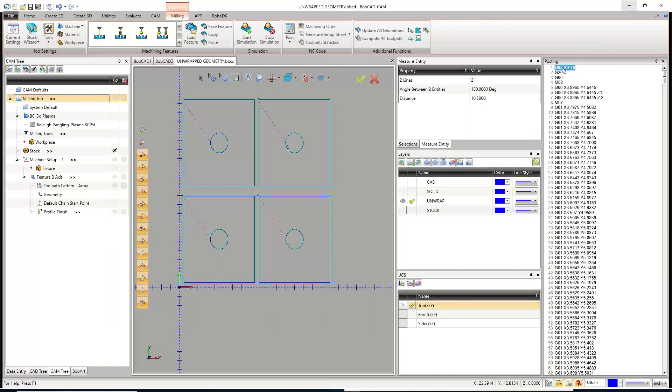So you'd want to have the head of your plasma in the bottom left-hand corner, where we have our origin. Like I said, whenever I use a machine that has a G92, usually I'm just going to pick a piece of stock that's a little bit bigger. Something that's got a little bit of wiggle room. So I don't want to start right on the edge, right on the corner. What I'll do is line up with the corner and then jog it in a quarter inch over, quarter inch up. And I just want to make sure that all my parts would fit within that kind of section.

So again, it's dependent on this guy right here, how your machine's going to run. But there's our code. Again, very simple code. This one looks to be, okay, I was about to say it looks to be missing a lot of things. You'll see there's our M08, shut the plasma off, rapid to the next location, M07, turn it back on, make our cuts. These super long ones here, as you can see, that's just really long. It's all line segment moves. That's all happening, again, because of how broken those pieces of geometry are.

So there's actually going to be a decently long set of code because we got a couple thousand entities on the screen. Scroll down to the bottom, 1,300 lines of code to make those 4 little parts. But again, that's because this isn't a real arc. It's kind of, I don't even know, like an oblong, a little wider and fatter on the ends, but looks good. There we go. Oops, didn't need to rotate. So there we go. We post the code.

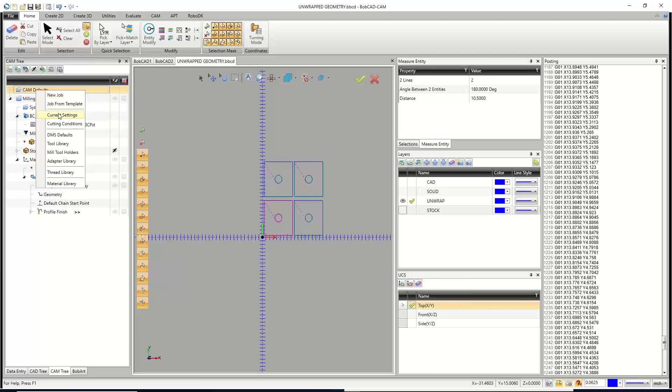If you are going in and manually changing this file extension every single time, you can actually do it inside of the CAM defaults. You right click on CAM defaults and you go down to current settings here. And then you pick the machine that you use all the time. So I'm going to go ahead and use this BC3X plasma. Now, when I pick that, if I go over to the posting tab right here, we have our NC file extension. So for me in this machine, it's always going to try and save it as a .nc.

Again, if you need a .txt, whatever you need, go ahead and just type it in right there. Add that in, have your .txt, and you're good to go. From then on out, it'll always default save to a .txt. And if you got a plasma and you got some milling machines and they take different file extensions, each machine can have its own separate file extension. They will work independently of each other. So I'll hit OK.

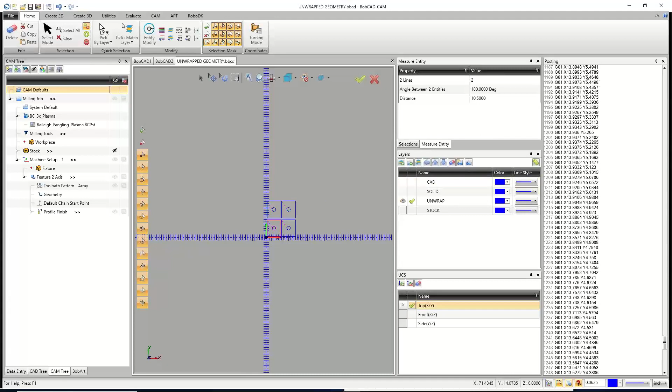And so you'd save your code. And then the final step is generating a setup sheet. Now, I don't know if generating a setup sheet is going to help you guys much, but it is an option and it is something we can do. So I always just go to my milling tab here, and there's generate setup sheet. But for me, there's a little setup that I do before I generate my setup sheet.

And that is I'm going to unblank my stock, so I have kind of a visual. And then I'm going to go right here to my machine setup one, and I'm just going to left click on it. I'm not editing anything, I'm not really doing anything. I'm just clicking on it so that it highlights it here in the bottom left-hand corner for me. That way I can say, generate a setup sheet. I'm going to use the full setup sheet, and I'm going to hit OK.

And again, the reason I do all that work is because it generates this setup sheet, and it takes a screenshot of the part for me. So now I know where my origin is. I know what size my stock is. I didn't change the material, but it's set to 6061. And right down here we have our tool information and then our tool path information.

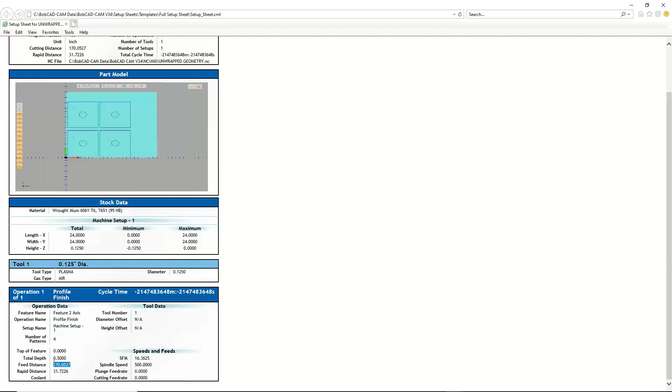Now, because I didn't give it any feed rates, it comes up with this outrageous number. But again, if you had given it the feed rates, then you could calculate it. Another thing, though, you've got to think feed rates are usually broken down into inches per minute or millimeters per minute, depending on your machine. I have a total feed distance of 170 inches.

Pull up my calculator here. So if I have 170 and I'm going at 20 inches per minute, I say 170 divided by 20. Should take about 8.5 minutes to cut at 20 inches a minute. If I'm going 170 divided by 100 inches a minute, 1.7, so about 1 minute, 40 seconds, something like that. So not too bad. But again, there's no way of getting that calculation unless you put your feed rates into BobCAD, which some of you may have to.

Now, the last bit here is what do you do with this setup sheet after you're done? What I usually do is I right click here. I go down to print. And then I've got to move over right here. I use the Microsoft print to PDF and just say print. And it actually doesn't print the sheet. It just pulls it up right here.

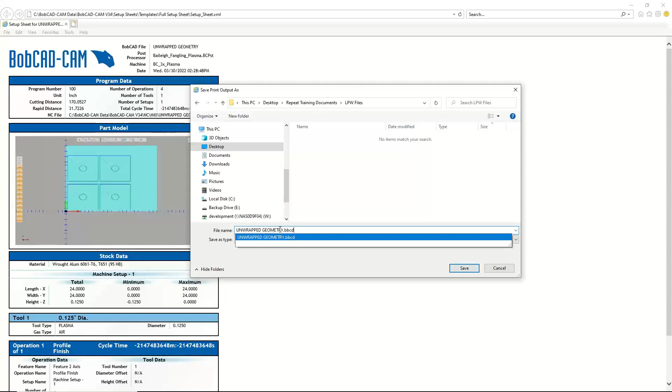So I could go in here, pick my LPW Files. That's not the one I wanted. That's the one I wanted. And I could name this. This is Unwrapped Geometry. And it's the PDF, and then save it. And so that's now going to be in that folder as a PDF that I can go and find at any point in time and use again.

Any questions so far? Anything you guys struggle with when you're doing this? Or really, where are your guys' hang-ups at? I'll give you a second to type some in. What do you guys struggle with? Is it the CAM side, or is it more kind of the CAD side? And maybe in the future I'll focus more on whichever one you guys say.

All right. Well, yeah, what else do we have for laser, plasma, water jet? There's really no differences between them. I'm going to just set up a new job real quick. This one's going to be for a laser. And I'll do my stock wizard next. Stock, calculate, there it is. Give it an 1/8 inch.

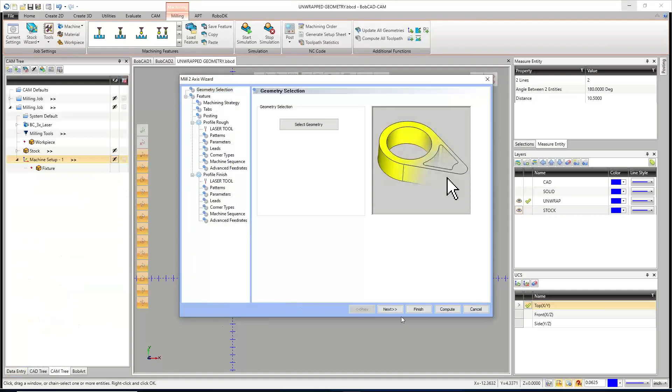This is going to give me that representation in the simulation that I'm etching, but I'm not cutting all the way through because I'm not giving it the full depth. So I'll go ahead and hit OK. Next my way through until I get to the page where I pick my tool path. And I'm going to choose just the profile finish, just like before. Right here we have our tabs, no changes. Posting, no changes. Laser tool, no changes.

And so you'll see the diameter of this was a bit smaller than the plasma. Again, same test could be done. You might go on a smaller scale. Instead of doing a 4-inch piece, maybe do a 2-inch piece. But cut a square and measure it and find out if it cut the right size. That's a big thing I'm dealing with. I got a couple guys with these Baileighs that they're just not cutting right.

Hold on 1 second. Yeah, give me 1 second, guys.

So we've set this up. So really with this one, it depends again on how your machine handles it. For those of you that use those Baileighs, you don't set up any of that information in BobCAD. You'll set up all that information at the machine. So Gary, if you're setting up the etching in BobCAD, it's usually going to be the power setting, pulse frequency. It's going to be those that have the cut conditions. So you have to enter in another page added. So you have a custom posting page, okay.

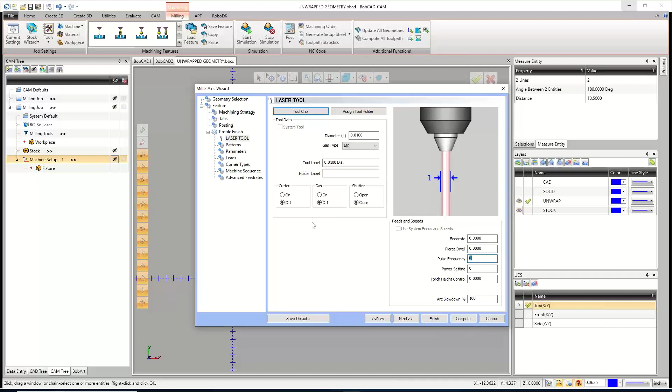All right? And then you'd go in, set up your cans or your cutting conditions, put in your sub-program callouts, whatever it is for the machine, and then finish setting this up. So you might not need this either. You might use something else. Compensation, this is going to be up to you. This one's set to compensate to the left, but a lot of times if I'm etching, compensation is turned off. I'm doing it as a center line cut. So then I can go next, right?

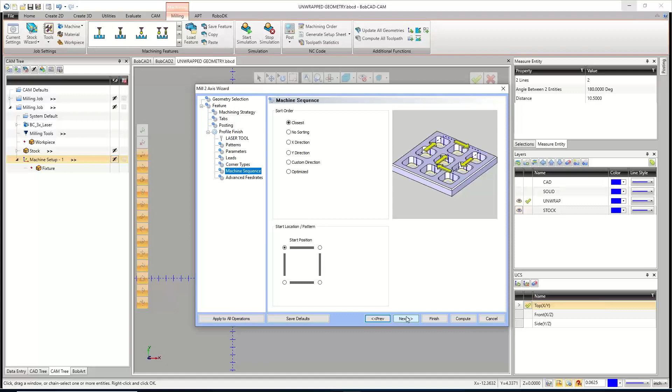Here's our parameters, nothing changed, leads. With this one, I'd want to turn on the etch probably right on the part. I don't want a right angle. I don't want to lead into it. Corner types, no changes. Sequencing, no changes. Advanced feeds, no changes. And then we'd hit compute. And so it's just going to go in and cut those arcs. And because you have that advanced posting page, this one would be set up for that. I would then copy this, paste it right here.

Now when you copy and paste, remember that your cutting conditions will carry over with that. So I'll say, yeah, I want to use the same top and depth. Now the geometry is going to be reselected as just the outside bits of geometry. So here, here, here, and here. And then I'm going to set my depth to a ½ inch. I want to go all the way through with this one and then hit OK.

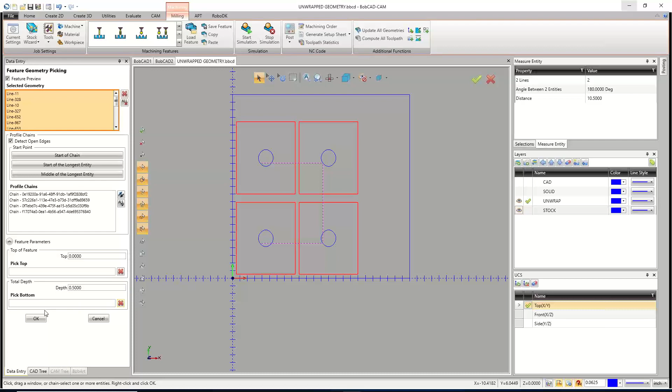Well, let me check my start points. I want my start points all in these corners here, all meeting up right there. So we'll come in there, go around, we'll lead out. Ooh, I could actually pick this in a really good order, but I'm not going to worry about it. So I'll hit OK.

And then I would go in and edit this feature. So editing this feature would now give you a chance to go in and edit the cutting conditions, the sub-program call out or whatever, and then go next. Next your way through. Really, the only change I'm going to make is I probably need compensation again. So I'm going to go with, I believe it's a right side compensation. I wasn't paying attention to the arrows there.

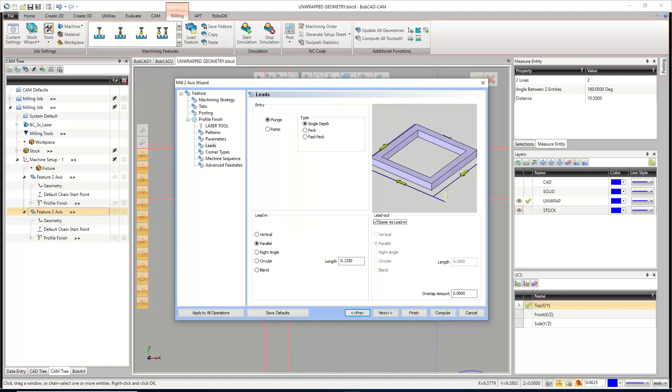Right side compensation. And on my leads, for this one, because I'm just doing the outside pieces, I'm going to go with a parallel lead. And I'm going to set the length to, this is, again, all dependent on how thick a material you're going, whatever your pierce is. And I'm going to go 1/8 inch and hit compute. And there we go. So it should be, I believe, let's look at this thing.

Yes, we are starting here. We're going to start right there. We're going to cut our way around all the way. We're going to end up right here. It's going to shut off the plasma, lead back in there, cut its way around, and then lead to the next one. Perfect linking on there. That's what I wanted to see. Good deal. So now if I go to simulate this one,

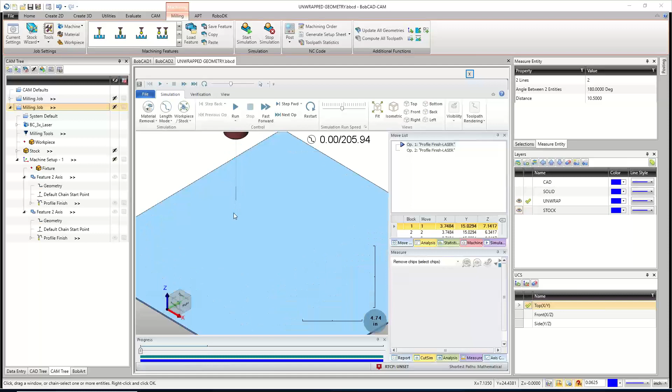what we'll see is the etch that we did should show up first. It's small. I can speed that up a bit. But it should go in, cut a little bit. Doesn't cut all the way through, just goes that, whatever I set, 20 thou or something deep. Speed that up. Right there. And then go right there.

And because you're doing the advanced posting page, these should both have independent sub-program calls for your cutting conditions called out in the post. I won't have them because I don't have that page. But that should do it. Did that answer your question there, Gary? Did that help? That's how I'd probably go about doing it.

Perfect. Yeah, that's going to be the best way. Break it into multiple pieces. And the way I would do it is layer it. Do your layers. Put all your etching geometry on its own layer. Put all your outside geometry on its own layer. Put your stock on its own layer. Keep everything separate. And these can be some of the easiest files you guys work on. If you don't do that and you keep everything in the same window all the time, they could be some of the worst parts to work on because there's just lines everywhere.

And there's also the fact that some of you guys are doing sign work, and I'm going to do that on the next laser plasma Waterjet. I'm finishing up one right now. I've been working on it in my free time for a couple hours. It's got thousands of entities in it that we use BobCAD to generate the wireframe from. And it's got tiny little gaps all over the place.